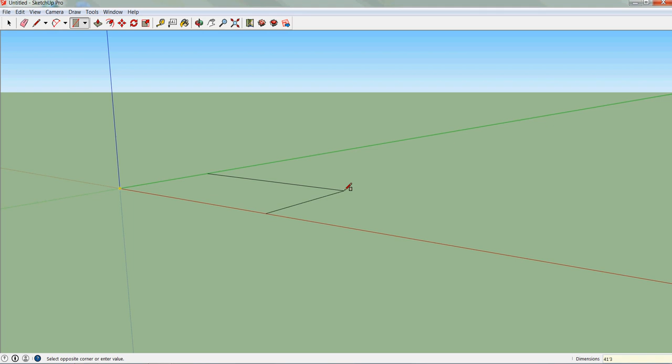So what I'm going to do is I'm going to break this down into various shapes. So I'm going to lay out the dining room, the kitchen area, that kind of block. And on the plans I can see that rectangle is going to be 41 feet 3 inches by 20 feet. So I'm going to go 41 feet 3 inches, comma, 20 feet.

And let's see here. So we should get our rectangle. And I just want to make sure that my dimensions are correct. So good. I got 41 feet 3 inches and 20 feet. That's a good start. We've got everything measured the way it's supposed to be.

So next I'm going to lay out the bedrooms. Okay, so we're going to lay out the bedroom rectangle, and I can see that the bedroom rectangle's got overall dimensions of 16 feet 9 inches, and it's 26 feet in length.

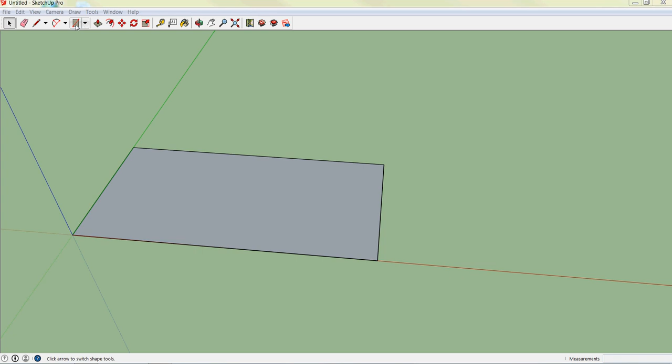So I'm going to lay out my rectangle here, so I've got 16 feet 9 inches, comma, 26 feet. And of course the rectangle got put in wrong, so let's try this again. So I've got 26 feet, comma, 16 feet 9 inches. Ta-da.

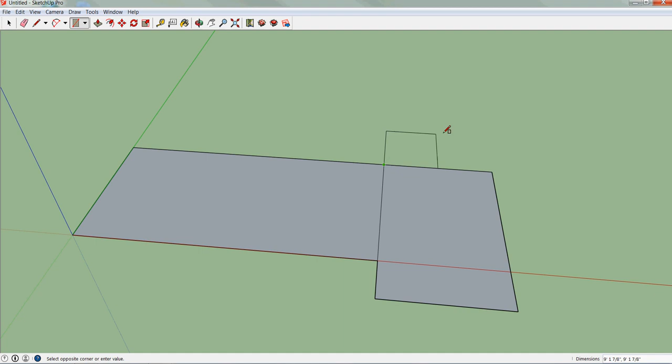Okay, so now I'm going to add my little laundry area section. So that little section's overall dimensions are 10 feet by 12 feet. So from this point, let's see if I can get this one right. 12 feet, comma, 10 feet. Yes, and let's just make sure that I got those dimensions right. It looks right. Okay, 12, 10. Okay, it is.

Okay, so next I'm going to lay out the garage. The garage actually kind of overhangs a little bit. So what I'm going to do is I'm going to draw a line 1 foot out here, almost like my little cheater guide. And from here, I know that the dimensions are 22 feet by 22 feet.

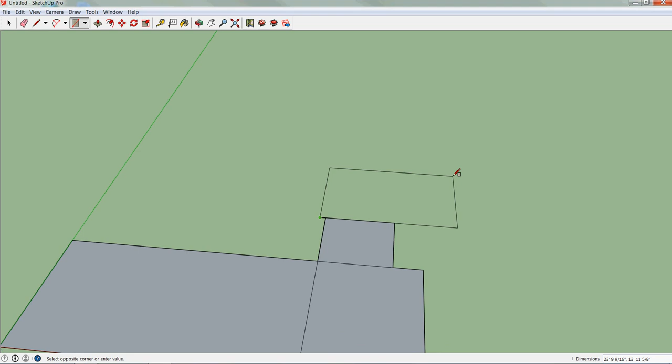Okay, so the first floor is taking shape. So I'm going to go ahead and save this, because if I don't, I guarantee that my computer will crash. So you might want to take a moment to do the same.

Okay, so now what we're going to do is we're going to pull some construction lines so we can lay out our walls. So the way that we do that is we take our measuring tape tool, and I'm going to offset this. The directions for the final project stated that the outside walls, unless noted otherwise, are 6 inches. So we're going to offset all of these walls 6 inches.

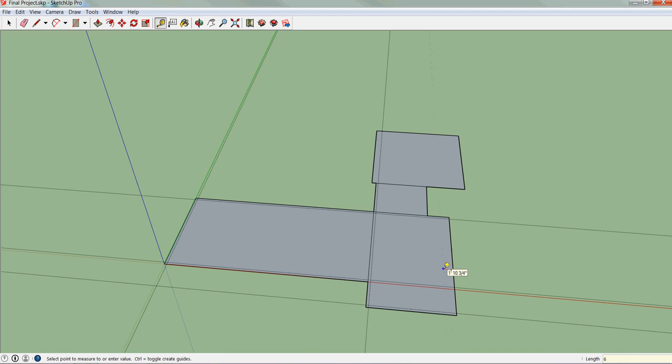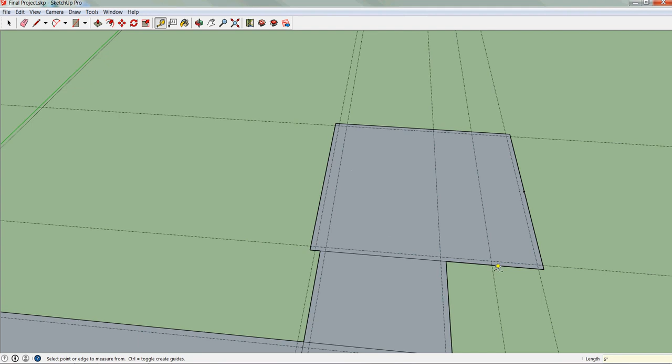So what I'm doing here is basically I'm just putting in some construction lines, because I'm going to come back and I'm going to add some rectangles actually to use for my walls. Oh, I should probably zoom in on that one. Let's see. And I think that's it.

Okay, so what I'm going to do now, I'm going to kind of rotate this so I can see better. And I'm going to basically take some rectangles here to lay out the walls. So I'm going to connect my points. There's more than one right way to do something. This is just, over experience from past classes, what we found to be the best way to lay this out.

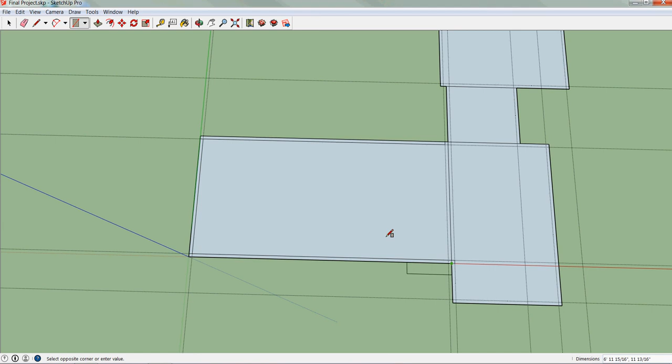So I'm going to lay out the rectangles, and then I'm going to go forward, and I'm going to be deleting all the lines that are overlapping. So let's see here.

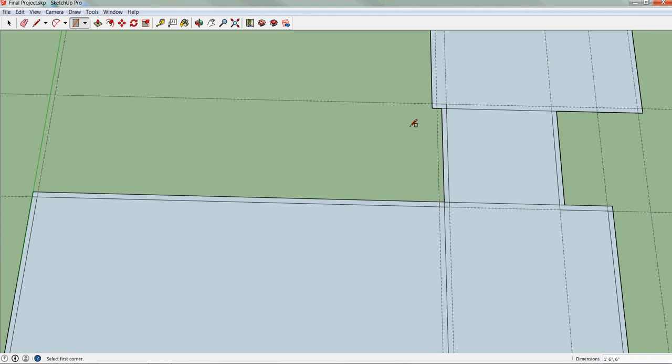So let's see, what haven't I got? Looks like I stopped it a little bit short there. So just take the time here to lay this out. Okay, so rather than having you guys listen to me drone on when I was clicking away with my mouse, I just kind of paused it there.

So what I've done is I've made rectangle outlines where all of my exterior walls are going to be. So now I'm going to go in and delete any points where we have intersections. So I'm going to grab my erase tool and go forward, and I'm also deleting my construction lines as I go. But I want this to be one solid shape, because we're going to pull up our wall so that the wall is the proper height.

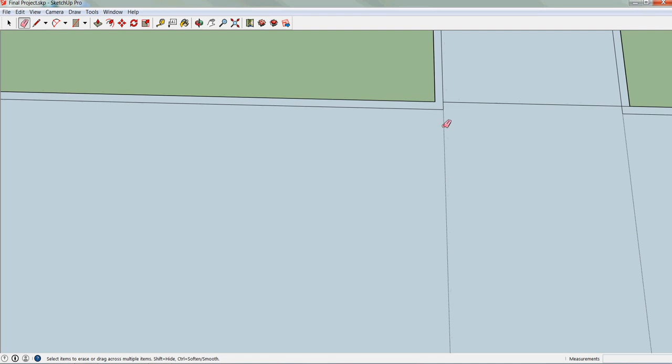So let's see. So any place that a line doesn't belong, I'm going to get rid of it, including my lines that I've used for construction lines. So I'm going to take a moment and do this. You guys do the same, and I'm going to meet you back here in a little bit.

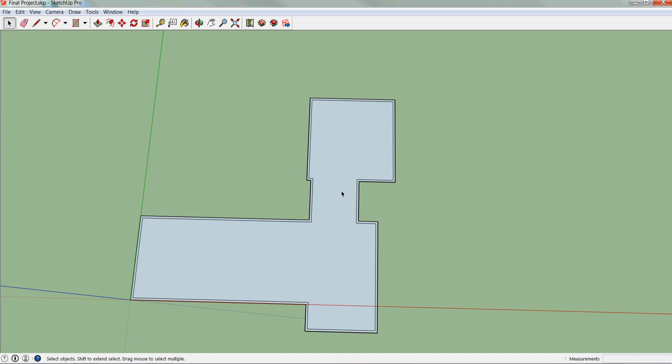Okay, so I went ahead and I laid out all of my exterior walls. So before I raise up all the walls, of course, I'm going to want to start laying out my interior walls. So I'm going to go about doing that next. And I'm going to start with basically a line of walls here where I actually have a 6-inch wall. This basically extends here and it's 6 inches. So let me see here. So this wall that I'm drawing construction lines for is actually a 6-inch wall.

And if we look on the plans, we can see that the length of this wall is 6 feet 7 3/4 inches. So I'm going to draw my construction line, and that's from the inside of the wall, so 6 feet 7 and 0.75 inches. Okay, if you're wondering where I got that, if you look on the drawing A-03, there is a closet that actually lists that dimension. On the far left, we've got that big dining room table, and just to the right of that, there's a closet that says shelving, and there's a dimension there of 6 feet 7 3/4 inches.

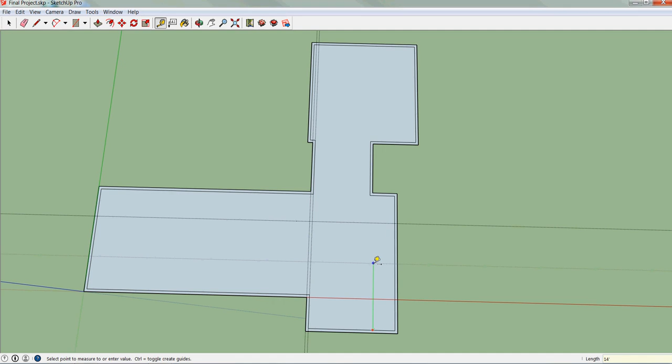Okay, so I can go ahead and start laying out these walls here. I can see also from this point up, my line is 14 feet 4.75 inches. Okay, so I can see that's going to be the end of this wall. So the cool thing with this video is if you're struggling to find some of the dimensions, hopefully walking through it with me will make it easier for you.

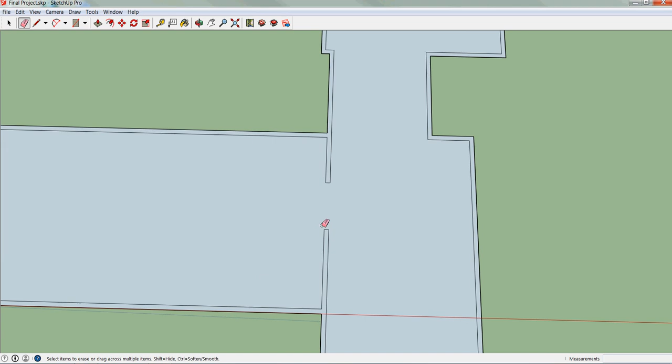So I'm basically just connecting my walls here. Okay, so I'm going to be moving around, and I'm just going to be adding walls exactly as they are dimensioned in this drawing. So the big thing is, once we start entering the inside of this room, all of our dimensions from the wall are a center to center dimension, meaning from the center of the wall to center of the wall. So it becomes a little bit of a pain in the butt where we have to actually offset some of these lines. So for example, I've got to offset this 3 inches because this was a 6-inch wall, and then I'm going to be using that to lay out my stairs here.

So I've got 3 feet 8 inches and 4 feet 10.5 inches. So I'm pulling all of these dimensions straight off of the plans. So I've got 2 feet 4.5 inches. Okay, and I can see that the inside of my stair, from the inside of the wall to the center of the stair wall, 3 feet 5.25 inches.

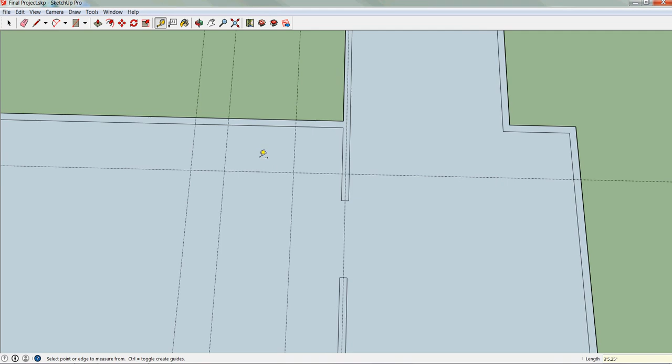Alright, so let's check that dimension because that seems a little weird. 3 feet, 5.25. Okay. So right away I can see I just measured this wall because something didn't look right, and of course, sure enough, it's not the right dimension. So I'm going to pull this dimension one more time and see if I can get this right here.

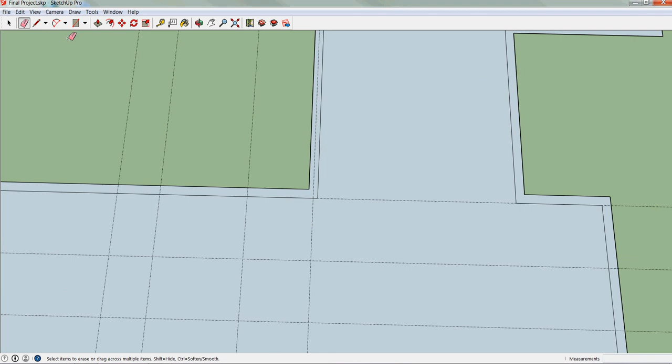So this wall should be 6 feet 7.75 inches. So it actually extends like so. So I'm going to just go ahead and delete this wall. And of course, it deleted everything. So let's see if I can do this instead. All right.

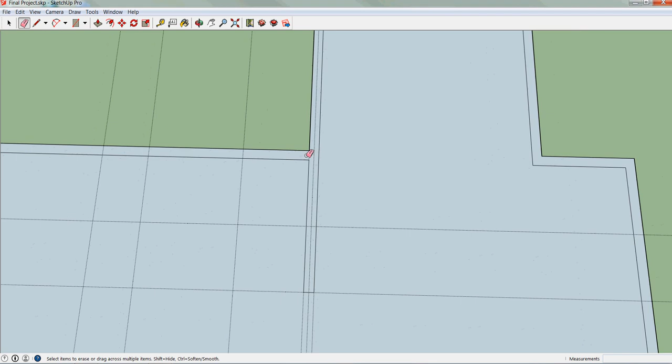Okay, so I'm just fixing this wall where I had a little boo-boo. Maybe you guys didn't have the same problem. Okay. Okay, so now everything in theory should be correct here when I'm laying out the stair. You can kind of see exactly where the stair is going to go. So I'm going to start piecing this together here.

So this is my inside center of the wall dimension, so I need to go out. I'm assuming my interior wall is 4 inches based off of the information that was given to me in the problem statement. So let's see here. So this, once again, is actually a little bit longer. So let's see here. I am going to make this wall a little bit longer. As you can see,

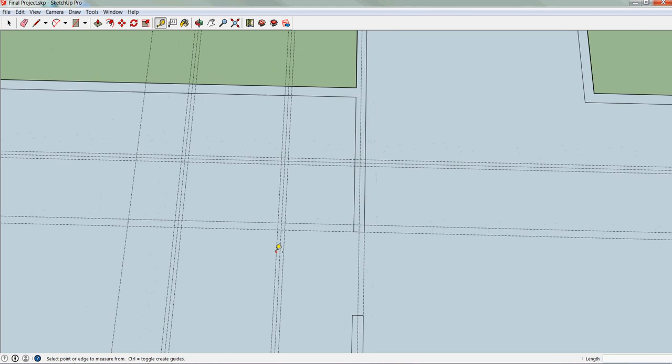this is definitely an iterative process in terms of doing your final project. I'd like to say that you're going to get it right off the bat, but it's definitely something that's a work in progress. Okay, so I'm laying out the dimensions here for my wall. So let's see here. I'm going from my center line and I'm going 2 inches out if you haven't been following what I've been doing here. So I'm going to take my rectangles and start boxing stuff out.

Okay, one thing to note here, basically this little stub wall where our door is going to be going is more than likely going to be 4 inches, two 2x4s stacked on top of each other. Okay, because if you'll note, we've got a door opening here, 4 feet wide, and the door is 6 feet 8 inches tall. So let's see here. Yeah. Okay, so roughly, this will work out good. So I'm going to build my little stub wall here.

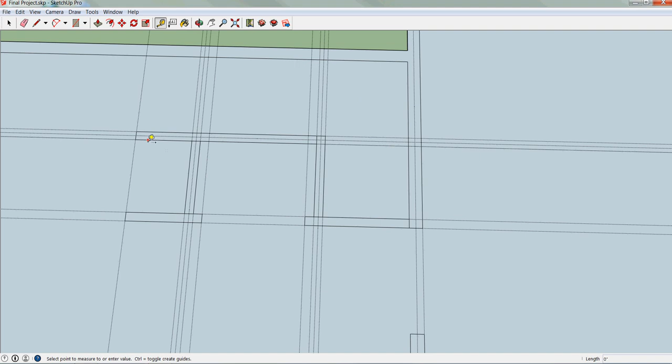So if you assumed this little stub, I'll show you what I mean. So this little stub right here, if you've gone ahead and assumed that it is 4 inches or 2 inches, that's fine. I don't really get too picky about that. The big thing is having you guys have a decent understanding of how to work this program. So let's see here. I have got another little stub wall here, another wall here, and this little stub is only going to be 2 inches out. And this will be 4 inches.

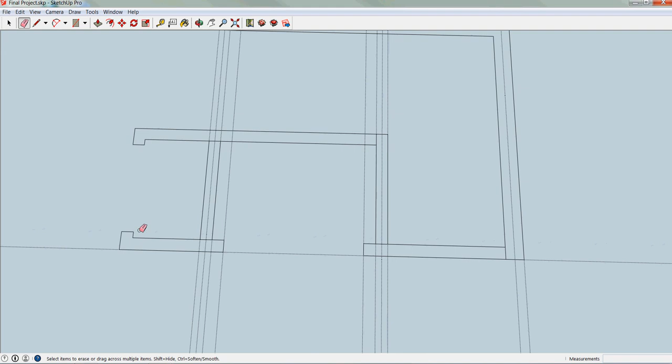Okay, so next up I'm going to be getting rid of the lines that I don't need. So I'm going to take a moment and do that, and then I'm going to come back to you guys here. Okay, so looking at this, I'm just going to check my dimensions quick. Call me paranoid. It's real important that you get the stairs right. So looking at this, my dimension was 3'8", that's right. Okay, from here to here was supposed to be 4 feet 10.5, that's right.

And from here to here is supposed to be 2 feet 4.5, and let's check from this wall. From there it was 3 feet 5.25 inches. That's right to the center of my wall. And we've got our total distance from the inside of the outside wall to the edge of my stair is 6 feet 7.75 inches. Okay, so it looks like we have everything correct.

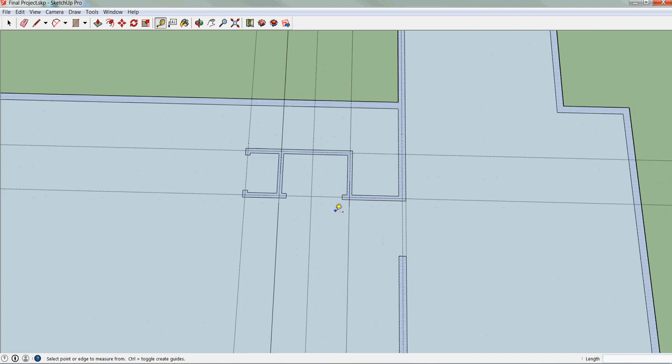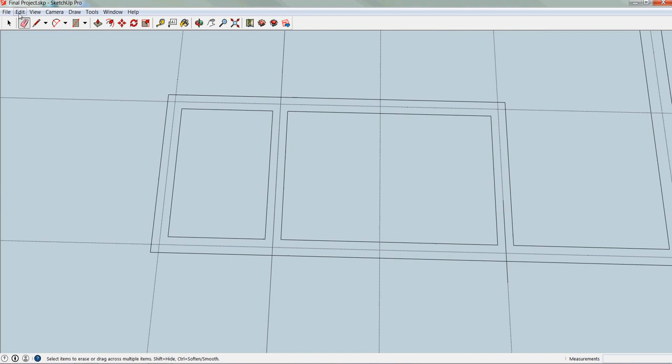So note, there's a couple different ways that we can do the doors, and actually, there's probably an easier way to do that. So I'm gonna show you guys how to do it this way. So we're gonna actually box out and pretend like the doors aren't there. Reason I say that is that way when we go back later and cut out the doors, everything will have a door header above it. Okay, so basically we're boxing it out as if the doors aren't even there. Okay, so I'm going to move around, and I'm going to do the exact same thing to all the other spots on the first floor.

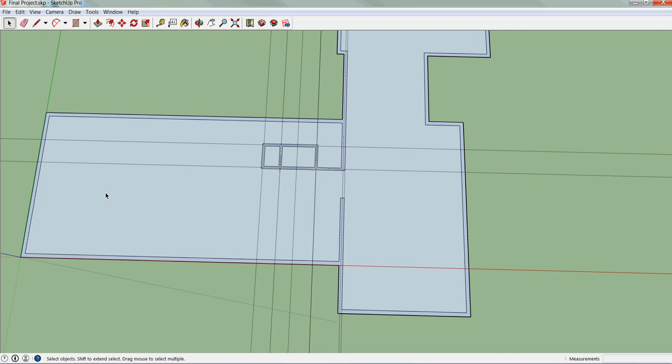And I don't know that it's necessarily crucial for me to literally walk you through how to find the dimensions because they're listed on the drawing. So if you have any issues interpreting the drawings, by all means call me or email me. I'd be happy to lay them out for you. So what I'm going to do is lay out the rest of this first floor here, and then show you guys how to raise up the walls on the first floor so you can start adding doors and all that fun stuff.

Okay, so I've gone through and I've completed the first floor level, the generic floor plan, and a couple things to point out as I was mentioning. I did not notch out any doors. I initially started doing that in the video, and it's going to make more sense actually to have the walls go straight up, and then we're going to punch the doors out later using the push-pull command.

So anyway, this is our final layout. Hopefully you get your first floor plan to look like this. There were some dimensions that I had to assume. Once you get into the kitchen area, things get sketchy, so I just assumed this little stub wall was 3 feet.

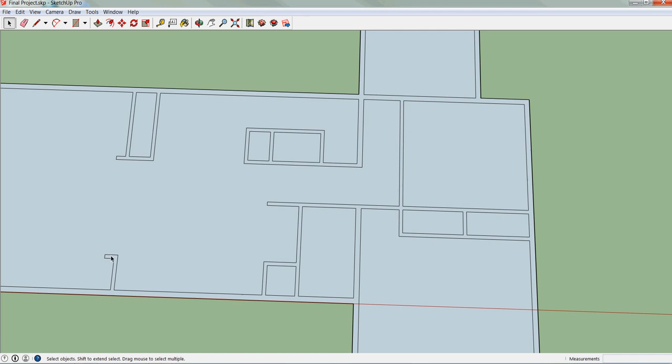Basically, whenever there aren't dimensions that are given to you, this closet, for example, I saw that the door had an overhang of, it's a 2 foot 6 inch door, so I assumed this wall was 2 feet 6 inches, and I just split this literally in half to build this closet. Like I said, the kitchen area, I assumed this was a 3 foot stub wall, and the dimensions for everything else were pretty clear, so you should be able to lay this out.

The big thing, I just can't express how important it is, is making sure that you lay out the stair properly, because that's going to be going up through both floors, so it's real important that we get that right. Okay, so once we have our first floor laid out, what we're going to do is actually raise up the walls so we have actual walls to our house. So I have saved this because God knows we need to save that.

Before we move on though, we're going to add a layer here. So under View, Toolbars, I'm going to add my Layers toolbar. And we're going to add a layer called First Floor. Real important that we have everything on layers, because if we don't, it's going to be real confusing once we stack everything. So we're going to highlight everything and put it on the first floor. So just like AutoCAD, we want to make sure that we have everything on layers.

Okay, so before we actually raise the walls, since the second floor is obviously very similar to the first floor, we're going to copy this, and you just do Control-C just like you would in any Windows program. Control-V, and we're going to put what we're going to be mutating into our second floor over here. So I'm going to create a new layer that is second floor.

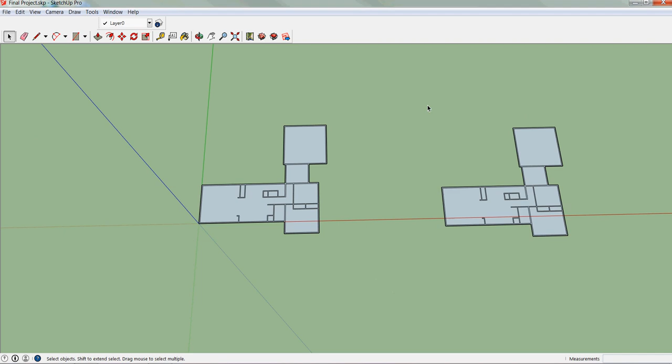And what I'm going to do is highlight everything that I want to be the second floor. I'm going to put it on the second floor layer. For whatever reason, it didn't take. Okay, so everything I have over here is on the second floor. Everything over here is on the first floor. So now I can actually go forward and raise the walls on my first floor.

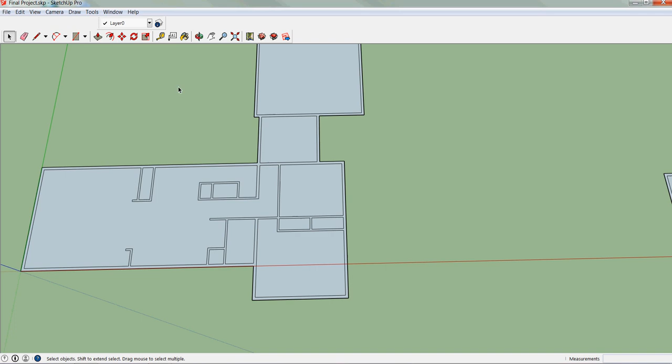So I'm going to raise my walls 9 feet 4.75 inches and press enter. So now I actually have walls. It's starting to look like a real first floor. Okay, so in the next video I'm going to show you how to tweak what we've already done for our first floor and turn that into our second level.